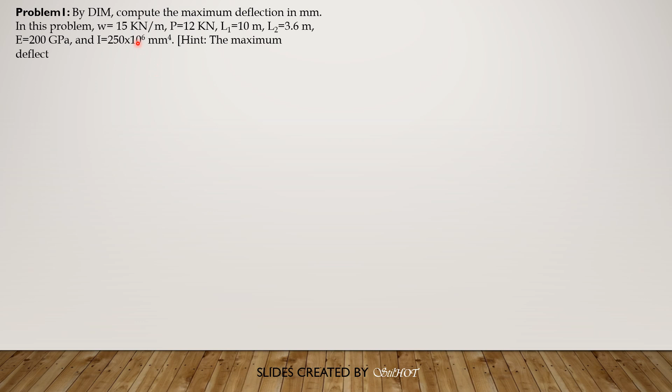So this is the first problem. By double integration method, compute the maximum deflection in mm. In this problem, the uniform load is 15 kilonewtons per meter and the concentrated load P is 12 kilonewtons. L sub 1 is 10 meters and L sub 2 is 3.6 meters. Modulus of elasticity is 200 gigapascals and moment of inertia is constant at 250 times 10 to the 6 mm to the 4th.

So take note that the maximum deflection may be positive or negative. There's a possibility that it is positive at C and the negative deflection will be somewhere between the supports. So first, let's solve for the reactions at A and B. Of course, AX is 0.

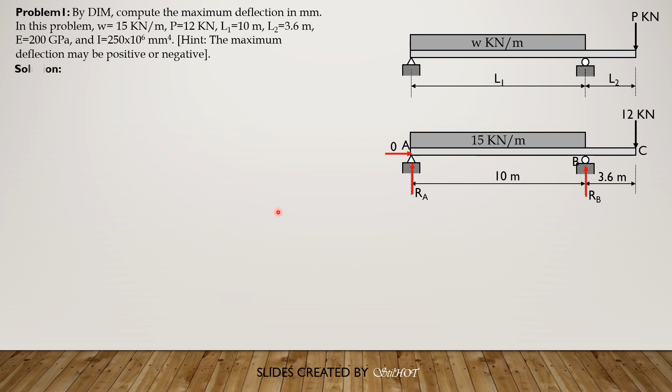So summation moment about B equals 0, clockwise positive. RA times 10 plus 12 times 3.6, then minus 15 times 10 times 5 equals 0. Solving for RA is 70.68 kilonewtons. Likewise, summation moment about A is 0, counterclockwise positive: RB times 10, minus 15 times 10 times 5, minus 12 times 13.6 equals 0. So it's up to you to verify that R sub B is 91.32 kilonewtons. You need to check summation of forces in Y, and the value of RB is really 91.32 kilonewtons upward.

So to set up the equation of the elastic curve, which is the moment equation, for this case we can have one moment equation for the entire beam. So we extend the uniform load here in portion BC and add it with a counter upward load of 15 kilonewtons per meter. So that's it. Our origin is A. So from origin to that section is X.

So therefore, the equation EIY double prime, equation of the elastic curve, is RA, which is 70.68 times X, plus RB times quantity X minus 10. Then plus 15 times X minus 10 times X minus 10 over 2, or plus 7.5 times quantity X minus 10 squared. Then minus 15 times X squared over 2, or minus 7.5 X squared. That's the equation of the elastic curve.

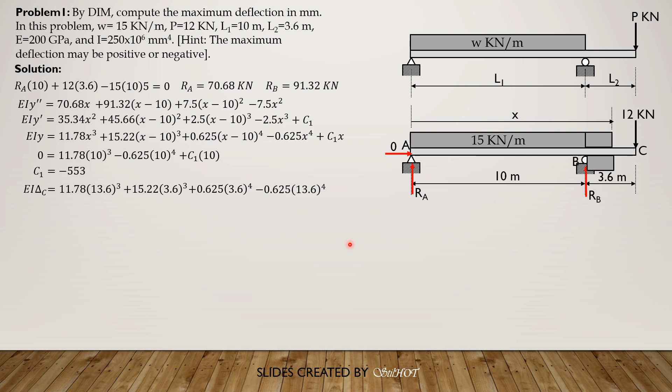Then we can now evaluate the deflection at C first, because this is one possible location of maximum deflection. So we set X as 13.6 into this equation for EIY: 11.78 times 13.6 cubed plus 15.22 times 3.6 cubed plus 0.625 times 3.6 to the 4th, then minus 0.625 times 13.6 to the fourth, then plus negative 553 times 13.6. So evaluating, EI delta C is 1,544.976. The unit is kilonewton meter cubed.

Then let's compute delta C in mm. So we convert kilonewton meter cubed to Newton mm cubed by multiplying this by 1,000 to the fourth.

And E is expressed in megapascals, 200,000 megapascals, or 200,000 Newton per mm square. And the moment of inertia is already in mm to the fourth. So the units in the denominator is Newton mm square. The numerator is Newton mm cube, so the net unit is mm. So delta C is equal to 30.90 mm, and because it is positive, it is upward.

Next, for maximum deflection between the supports, since the slope of the tangent at the lowest point is horizontal or 0, then we set EIY prime, because this represents the slope, to 0. And we ignore the second term, which is x minus 10 squared, because we expect that the value of x is less than 10. And so this is negative, this is also negative, so we ignore these two. So 0 equals 35.34x squared, then minus 2.5x cubed, then plus C sub 1, or minus 553.

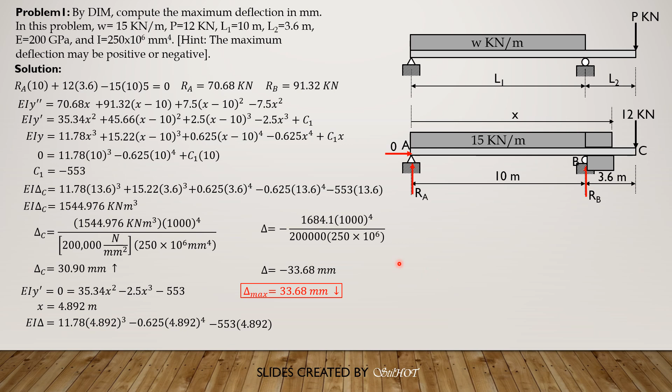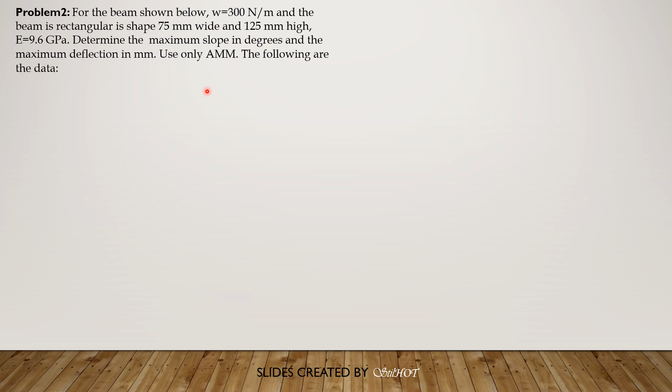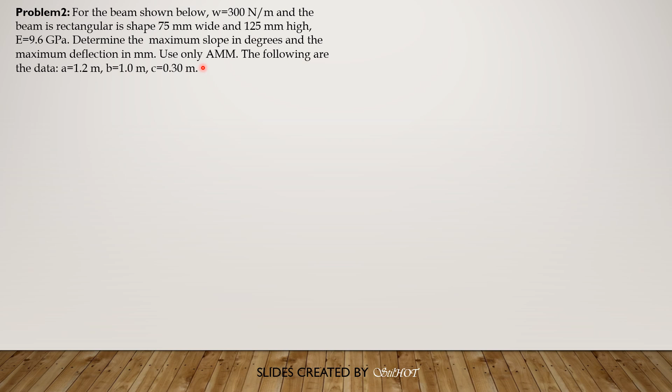For our second example, for the beam shown below, the uniform load is 300 Newton per meter and the beam is rectangular in shape, 75 mm wide and 125 mm high. Modulus of elasticity is 9.6 gigapascals. Determine the maximum slope in degrees and the maximum deflection in mm. Use only area moment method. The following are the data. A is 1.2, B is 1.0 meters, and C is 0.3.

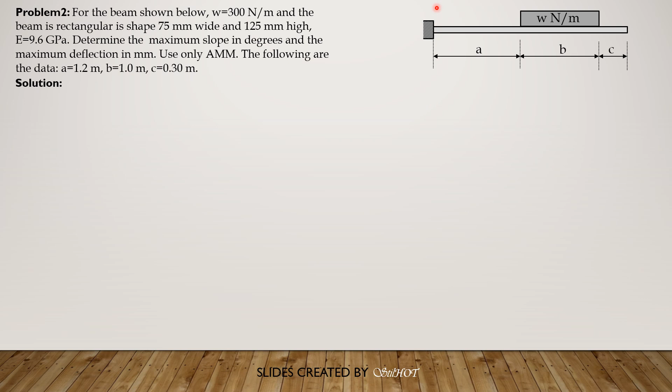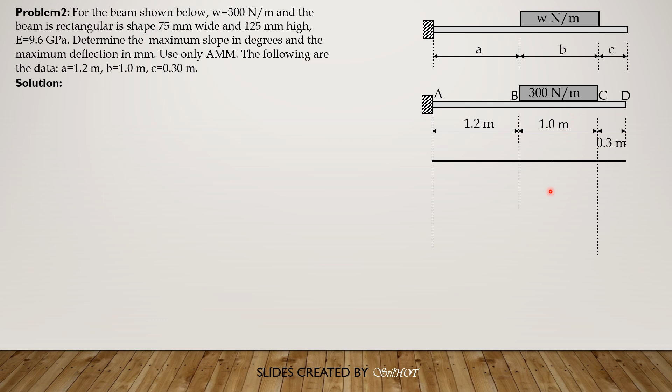So because we are required to solve this problem by area moment method, we select this fixed end, fixed wall as our moment center. But we substitute the values of the data, A, B, and C, and the load. So first, let's have the moment diagram by parts. So we compute the moment of this uniform load at B first, then at A, so that the resulting moment diagram would be easy to compute, especially the area. So this is the moment second degree, because this is 0 degree, so the moment curve would be second degree, 0 plus 2. So 300 times 1 times 0.5 is 150 over EI.

The unit here is Newton, 150 Newton meter, the numerator. Then at the wall, so 300 times 1, so 300. The distance of the centroid to the wall is 1.7. So 300 times 1 times 1.7 is equal to 510 over EI. Then we divide this moment diagram into known areas like that, and to make this triangle. So 510 minus 150, the height of this triangular portion would be 360 over EI.

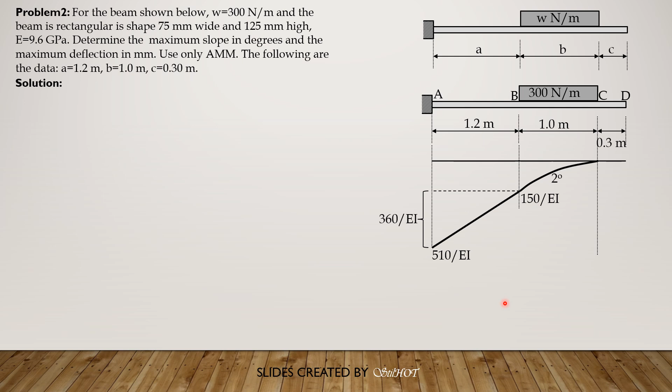So we draw the corresponding elastic curve. This is the expected elastic curve. And so the maximum deflection occurs at D because the portion CD is straight, because CD is unloaded, then the maximum slope occurs at C or at D. They are equal because this is straight. So this is deviation of C relative to A, and this is the maximum deflection, which is deviation of C relative to A plus this portion here, which is 0.3 of theta maximum.

So this is theta maximum, by the way, is the theta between the tangents at A and C. So remember, EI theta AC is the area between A and C, and it is the change in slope between the tangent at A and the tangent at C. But the tangent at A is horizontal. That's why theta AC is automatically theta max or theta C, which is also equal to theta D.

So again, this vertical distance from the tip of deviation of C relative to A to the tip of this elastic curve at D is 0.3 of theta max. Why? Because tangent of theta max is the opposite over 0.3. So that's why the opposite is 0.3 times theta max.

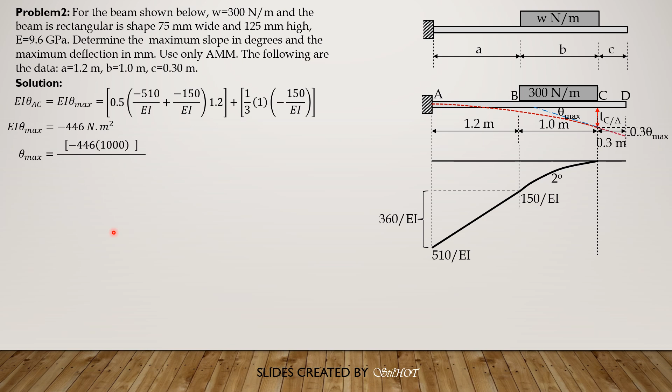So we just convert this to Newton mm square. E must be in megapascals, so 9,600 megapascals, and I is in mm to the fourth, so that the resulting unit would be in radians. Then we multiply by 180 degrees divided by pi radians. So negative 446 times 1000 squared to convert it to Newton mm square, then E is 9,600 megapascals or Newton per mm square, then I is BH cubed over 12, 75 times 125 cubed over 12. That would be in radians times 180 degrees over pi radians, so that would be in degrees.

So theta max is negative 0.2181 degrees. Negative means clockwise. Then for the maximum deflection, we have deviation of C relative to A plus 0.3 of theta max, where deviation of C relative to A is the moment of these areas with respect to C. These are the locations of the centroids. For the rectangular area, the distance is 0.6 plus 1, so 1.6. For the spandrel, this is 1/4 or 0.25, so its distance from the right is 0.75. And for this triangle, this is 2/3 of 1.2, 0.8 plus 1, so 1.8.

So EI deviation of C relative to A is, beginning with the spandrel, 1/3 of 1 times negative 150, then moment arm 0.75. For the rectangle, it is 1.2 times negative 150, then times 1.6. Then for the triangle, it is 0.5 of 1.2 times negative 360, then times 1.8. So computing for that deviation, it is equal to negative 714.3 Newton meter cube.

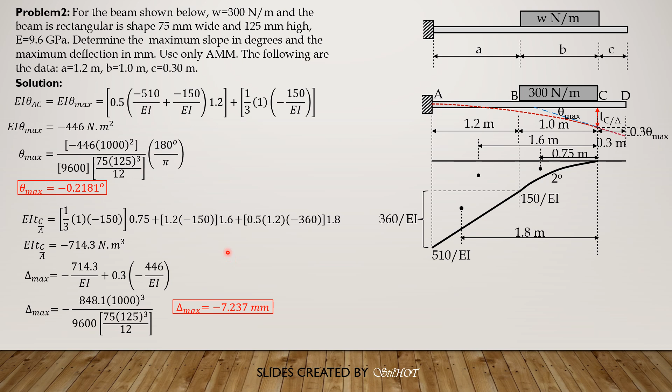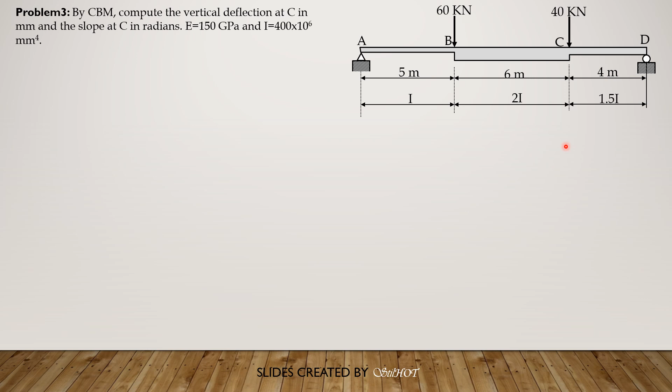So that's it. And finally, for this third problem, we solve this by the conjugate beam method: the vertical deflection at C in mm and the slope at C in radians. Modulus of elasticity is 150 gigapascals constant. There are three segments of different moments of inertia, and I is 400 times 10 to the 6. So let's compute first for the reactions.

So let's prepare the moment diagram by parts, and make C our moment center. Call that AY, AX is 0, then RD. Summation of moment at D equals 0: AY times 15 minus 60 times 10 minus 40 times 4 equals 0, so AY is 152 over 3 kilonewtons. Likewise, summation of moment about A equals 0, counterclockwise positive: RD times 15 minus 60 times 5 minus 40 times 11 equals 0. So R sub D is 148 over 3 kilonewtons upward.

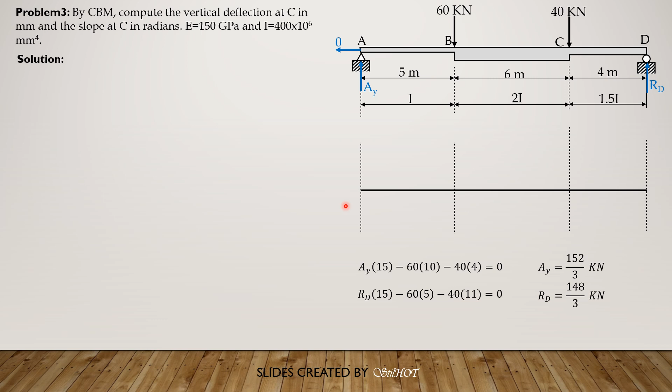Because we make C our moment center, AY, 152 over 3, times 5 over EI is 760 over 3 over EI, just to the left of B. Now, just to the right of B, the moment of inertia is 2I, so we divide 760 over 3 by 2. So it becomes 380 over 3 EI.

Then the moment of AY about C is 152 over 3 times 11. Then divide that result by 2 because the moment of inertia for up to C just to the left is 2I. So 836 over 3 after we divide the result by 2. Again, it is 152 over 3 times 11, then divided by 2 because the I is 2I. So 836 over 3 EI.

Then the moment of RD is 148 over 3 times 4, because that's 4, then divided by 1.5. So the result is 1184 over 9 EI. Then the moment of the 60 kilonewton load is 60 times 6, 360, but because the moment of inertia is 2I, divided by 2, so it is only 180 over EI.

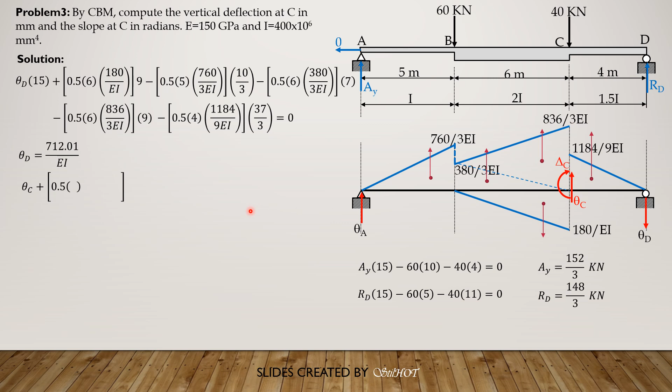That's delta C. So to solve for theta C, we simply sum up forces vertical considering CD. So theta C plus 0.5 of 4 times 1184 over 9 EI equals theta D, which is 712.01 over EI. So solving for theta C is 448.899 times 1000 cubed, because the unit is kilonewton meter squared, so times 1000 cubed to make it Newton mm squared, divided by E in megapascals, 150,000 megapascals, then I 400 times 10 to the 6. So theta C is 0.007482 radians.

Then for delta C, summation moment about C equals 0, clockwise positive, so delta C plus theta D, which is 712.01 over EI, times 4 equals moment of the triangular load, 0.5 of 4 times 1184 over 9 EI times 4 thirds. Solving for delta C is negative 2497.225 over EI.

Then the numerator is kilonewton meter cubed. For the denominator, we have to convert E to megapascals and I in mm to the 4th. So we simply multiply the numerator by 1000 to the 4th, and the denominator E in megapascals and I in mm to the 4th. The resulting unit would be in mm. So delta C is negative 41.62 mm. So that's it. And I hope that you were able to understand the solution.